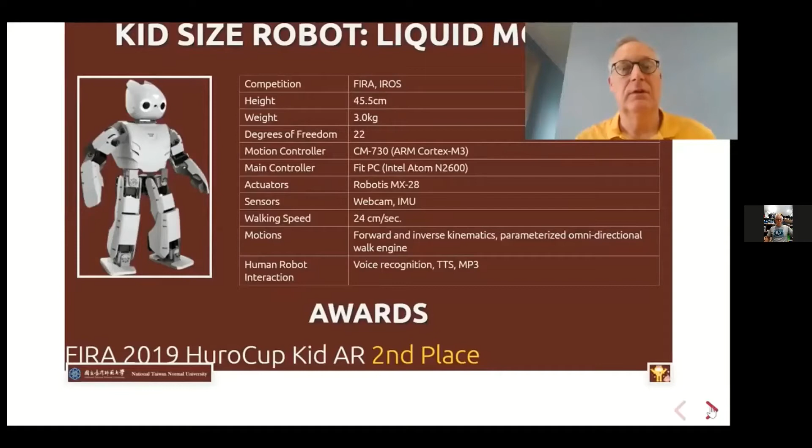To give you an idea of the kind of work we're doing, I first introduce the robots we have available in the ERC. One is a Robotis OP2 robot, about 45 centimeters tall, so it's a relatively small humanoid robot. We also built our own 80 centimeter tall humanoid robot, another 1.3 meter tall larger adult-sized humanoid robot, and our largest and most complex system is the Thormang robot, developed by a robotics company from Korea.

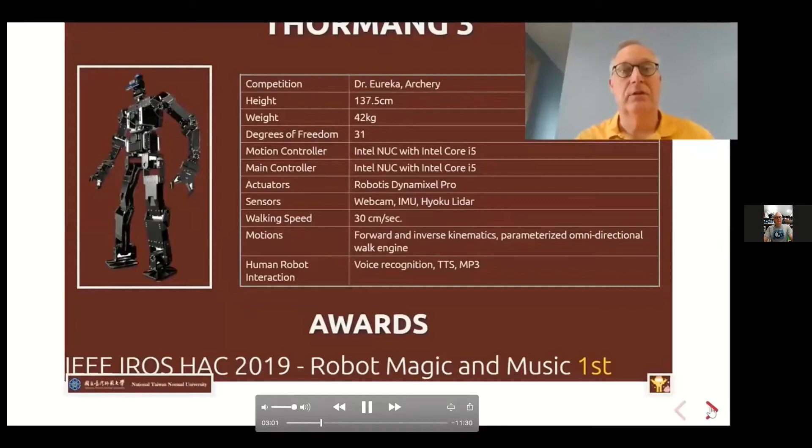All of these robots receive most of their information about the world through the vision system, so they all have cameras, and to balance, they use IMUs, gyroscopes and accelerometers mounted in the torso of the robot. The robots have also all been very successful at various robot competitions, so we won several first, second, and third places.

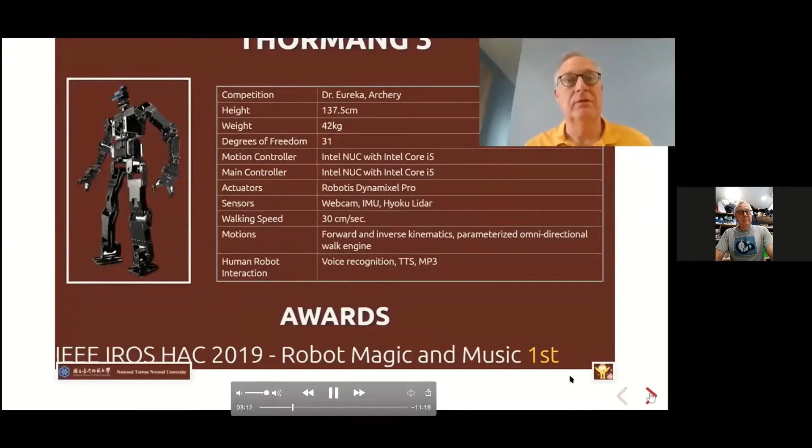As far as the research is concerned, there are 3 cornerstones. One is balancing, walking on 2 legs - that's a difficult problem for humanoid robots. Nowadays we can easily walk on a carpet or a wooden floor, but uneven surfaces are much more difficult. Gravel roads, a path through the forest, going hiking in the mountains is beyond what our robots can currently do.

Another area of research that I'm interested in is complex motion planning. Humanoid robots, because they have many degrees of freedom, have an almost infinite number of possible motions that they can execute, and only some of them will be successful. So being able to figure out which motions are going to be helpful for the robot is a tough problem.

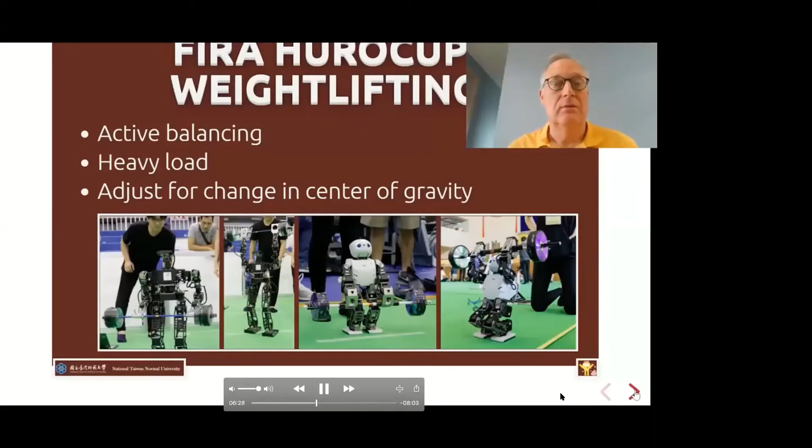So let's have a look at some of these events. First one I want to introduce is weightlifting. This is actually a balancing problem, where the robot starts with the weight low, then walks, and then has to lift it up. So here we can watch the video.

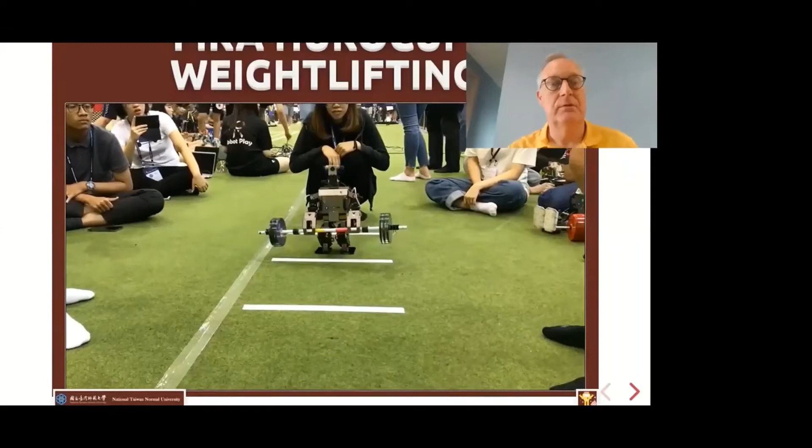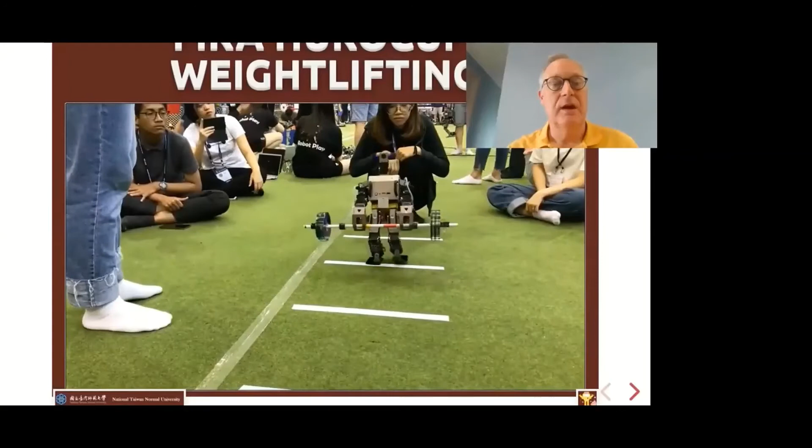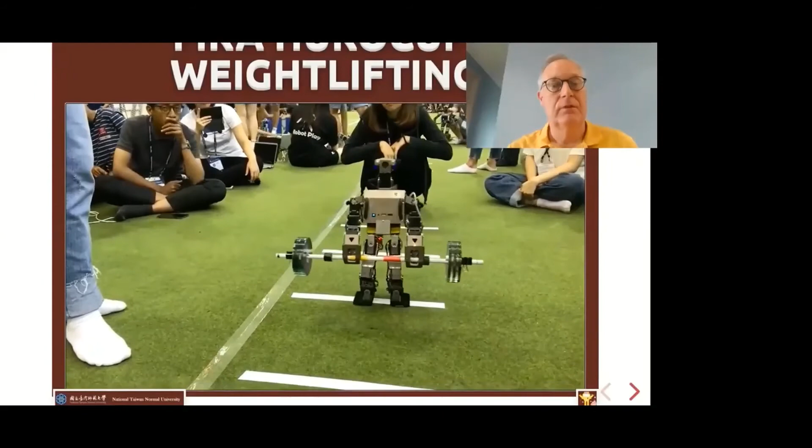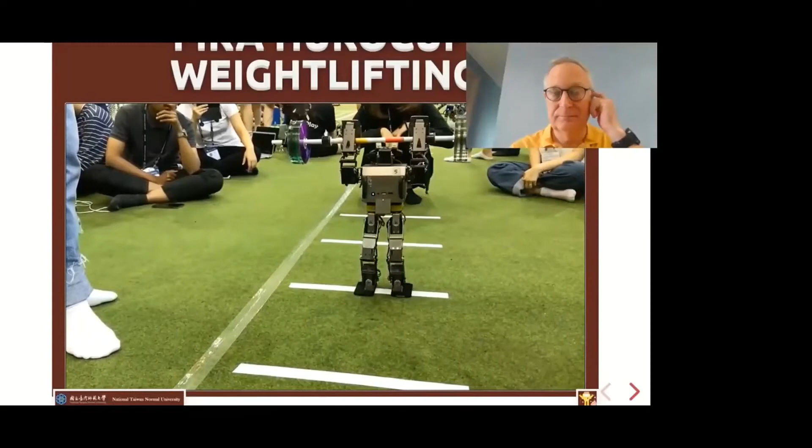I'm not sure why the audio cut out there, but the robot picked up the bar, has to find the bar, position itself close to the bar, now walked with the bar low, and then lifts it above its head. And now it will complete to the finish line.

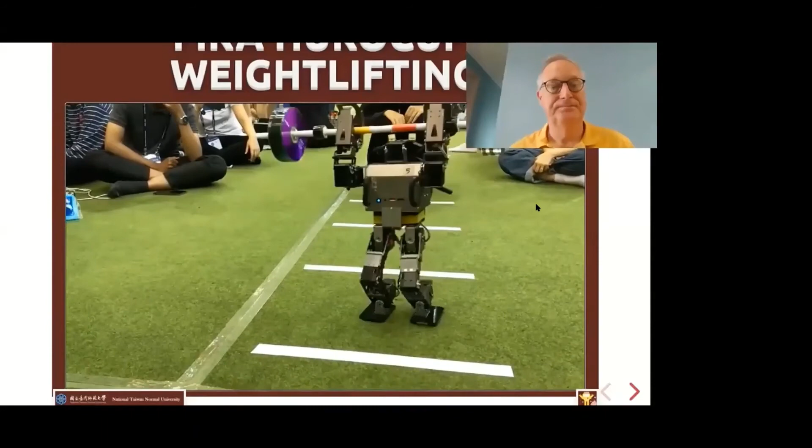So there, the big challenge is that the center of mass changes. The robot needs to run forward 3 meters and then backwards.

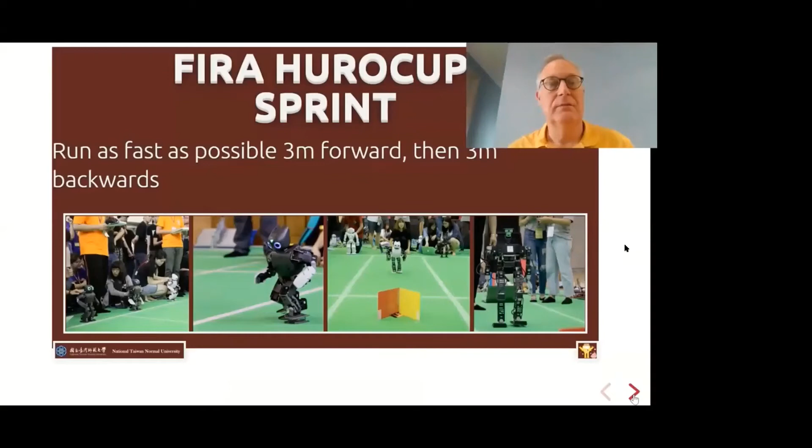Again, not sure why the video cut out there, but this is the sprint competition, 3 meters forward, 3 meters backwards, a raw measure of the speed of the robot.

I'm not sure if people can hear me, but the audio worked before.

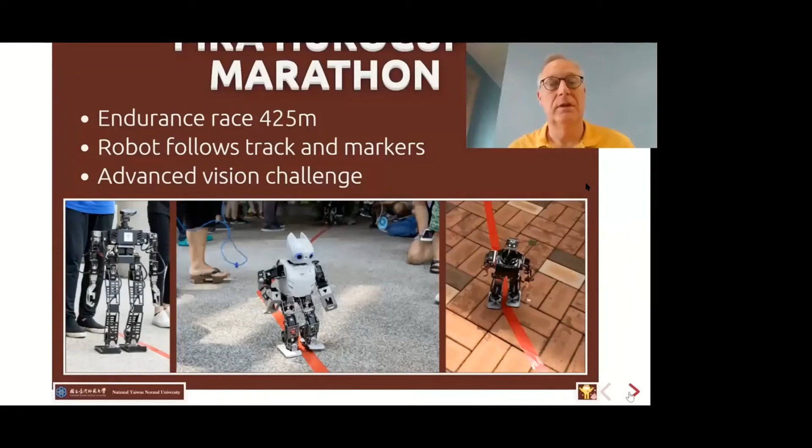Handlers running up and down the field there. We have the HuroCup Marathon, that is our endurance event. The robot has to walk 425 meters. It's also outdoors, so it's much more challenging for the vision system. Not everything is marked by a track. Certain parts of the track only have markers, like arrows that point the robot in the right direction to where it should walk.

We play basketball. Nobody is able to actually dribble the ball at the moment, so we're doing 3-point throws.

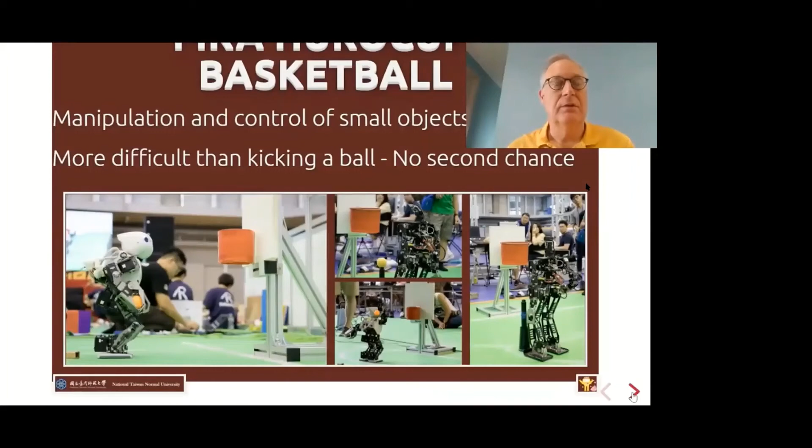We have archery. Here are pictures of the small robots, our kid-sized class. In order to be able to detect the target, archery is mainly a problem of highly accurate detection of the target and positioning of the robot relative to the target.

We use a histogram of oriented gradient feature detector in order to pinpoint the location of the target. Here's a video of our large Thormang robot doing the archery with an Olympic bow at 15 meters. Actually quite accurate. Shooting!

Our goal is to be able to beat the national and international world champions of archery, hopefully at the 2022 University Games. At that time, we would have to shoot 75 meters, not 15 meters.

We're also interested in robot magic as an application for human-robot interaction, because magic is all based on attention and the misdirection of attention. I believe attention is very important for intelligence, also artificial intelligence, but it has not received so much interest from the general research community.

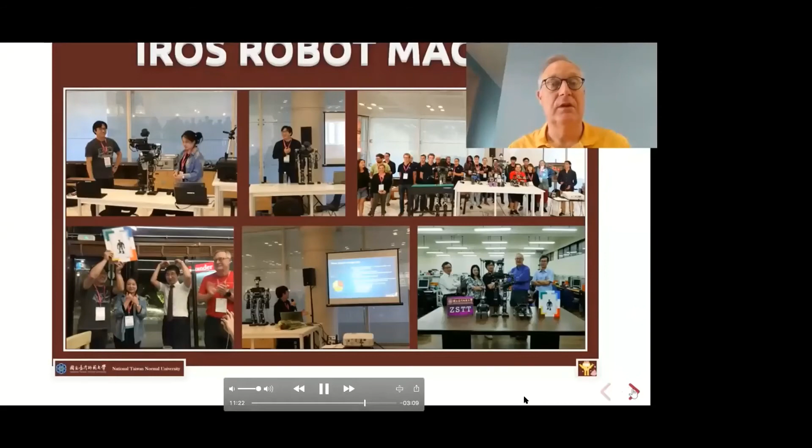We have another challenge where we're dealing with manipulation of these glass tubes. Dr. Eureka is a speed logic game for children and adults, and it's actually quite a bit of fun.

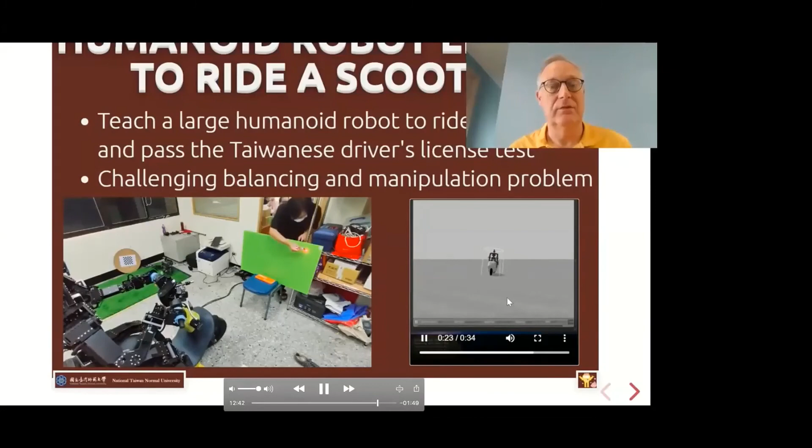On the left-hand side here, we're testing precision and accuracy of the steering control at the moment. With the laser pointer, we're making sure that the robot can control the steering angle accurately. On the right-hand side, it shows our first attempts at control of the robot, this one only in simulation. There's a disturbance and the robot tries to correct in order to make sure that it keeps driving the scooter and doesn't fall off.

Now, I get often asked about job prospects, and I believe robotics is a very good area to get involved in because it makes you an excellent problem solver. You get exposed to technologies and methodologies from mechanical engineering, electrical engineering, and computer science, rather than just a single domain. Students of mine have great careers in different areas, even though they may not be directly related to robotics.

Xiaohong Liu was the director for motion capture on Avatar. Another student of mine, Brian, is one of the project leads for Assassin's Creed. They work for various tech companies, also companies in Taiwan like Garmin, Gogoro, MediaTek, well-known companies in Taiwan are glad to hire my students. And some of my students have also successfully started their own startup companies.

So if you're interested in joining the ERC, then you need to have excellent problem-solving skills. We write a lot of software in different programming languages. I don't care so much about your GPA and SAT scores. If you want to impress me, then send me an example of your previous robotics or other projects.